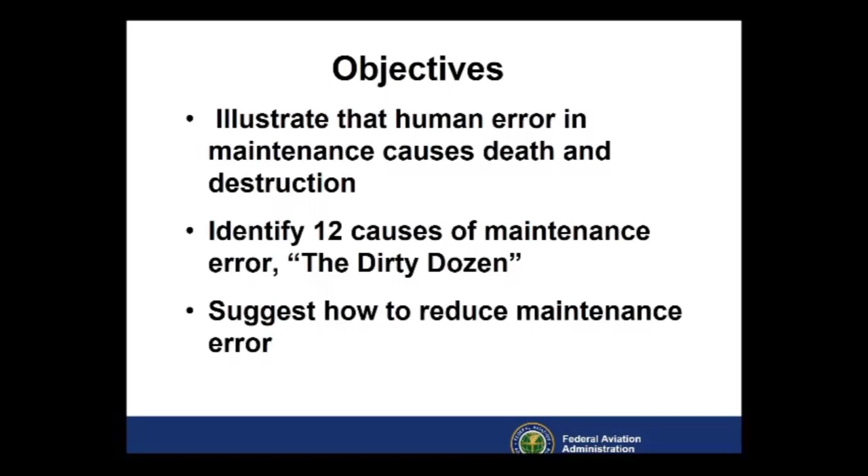Human error is both universal and inevitable. This means everyone will make a mistake sooner or later. In fact, the best people often make the worst mistakes. When learning of an accident caused by human error, it is common to think the person involved is somehow deficient in skill or character, while we, on the other hand, are well-meaning, motivated, experienced technicians. We just wouldn't do something that stupid. When we think in these terms, we discount the moral of the story and miss the lesson in it.

Apologize for the background noise. Before takeoff, the pilot set his altimeter to his home base field elevation at Nellis Air Force Base. His action perhaps was the result of habit. The elevation at his air base that he was at was 1,100 feet higher than Nellis. Even though the mistake was slight, setting the wrong altimeter setting, the outcome was tragic.

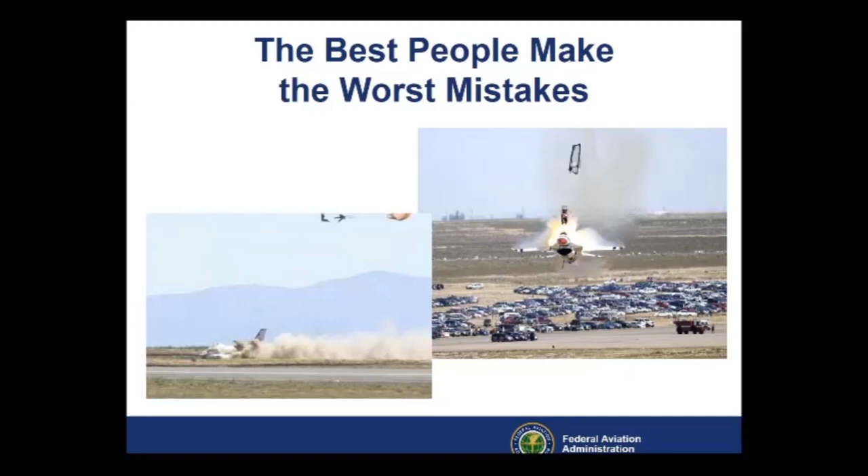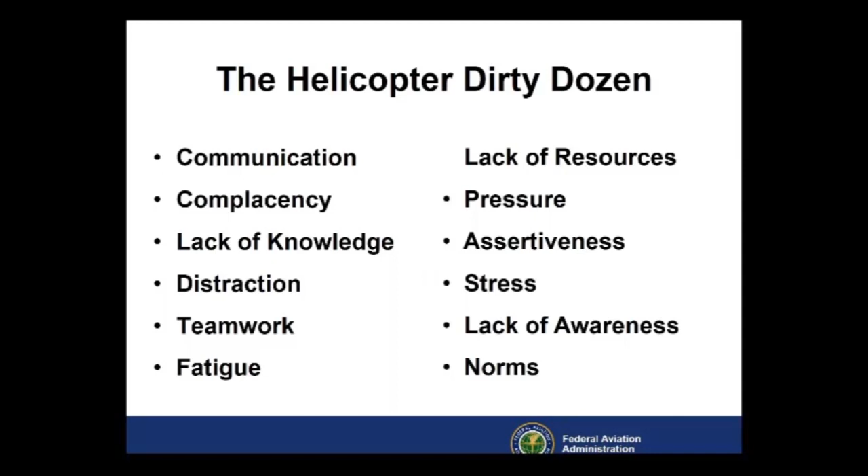So how do we prevent mistakes like this one? How do we break the chain of events that may well result in the loss of an aircraft or, worst case, a fatality? The Dirty Dozen is a poster series highlighting 12 preconditions for unsafe acts. In other words, factors that influence people to make mistakes. The series of posters was developed by Gordon DuPont while working with Transport Canada. It's not meant to be a comprehensive list. It's just meant to stimulate the human factors discussion.

Okay, so this is our first case study that we're going to cover for the Dirty Dozen. It's actually going to cover most of the Dirty Dozen. I would say maybe about 7 of the 12 Dirty Dozen are going to be covered by this one accident.

So on July 28, 2010, at 13:42 Mountain Standard Time, an Air Methods Corporation American Eurocopter AS-350B3 medical helicopter, November 509 Alpha Mike, during a VFR flight, under Part 91, descended rapidly and collided with terrain in Tucson, Arizona. The aircraft was substantially damaged and consumed by a post-impact fire. The pilot and 2 medical flight crew members were fatally injured.

The repositioning flight was for engine coking originating at the Marana Regional Airport in Tucson, Arizona at 13:32 hours, and the intended destination was the Air Methods Base in Douglas, Arizona.

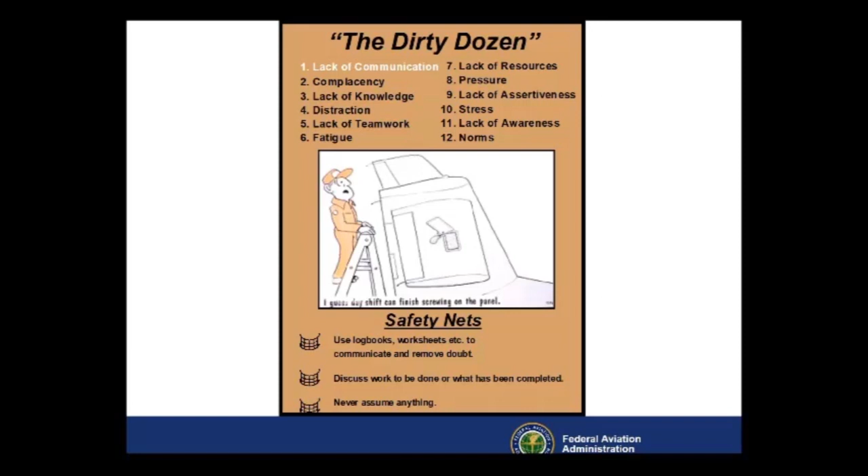Okay, we're going to cover a document that the FAA uses very often. I'm going to give you a little bit of background on that.

In 1953, the Civil Aeronautics Board, or CAB, revised the Civil Air Regulations to require that each operator apply for an OPSPEC, or Operation Specification, at the time of application for an air carrier certificate or an air agency certificate. Air carriers that existed at the time were issued OPSPECs to be used instead of the competency or temporary letters. The OPSPECs provide an effective method for establishing safety standards that address a wide range of variables.

In addition, OPSPECs can be adapted to a specific certificate holder or operator's class and size of aircraft and different kinds of operations.

Let's review. We're going to discuss the Dirty Dozen. So look at this, on the slide you see lack of communication between the FAA inspectors and the repair station.

So when the investigation was conducted, the FAA principal maintenance inspector stated he removed the work-away-from-station authorization for the repair station that supported Air Methods. The owner of the repair station stated he did not identify the changes when he signed the page of A004.

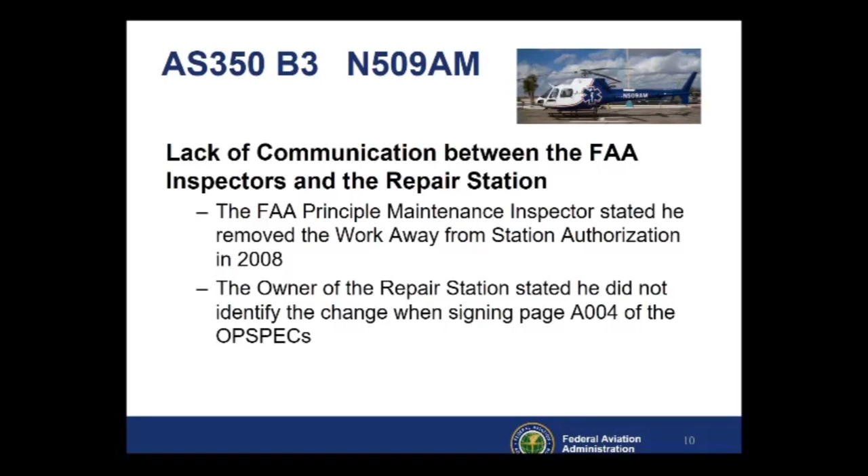Of the OPSPEC. So you ask, what does an OPSPEC look like? This is what they look like.

And they're issued to any operator or agency. When we talk about operator, we could be referring to an airline, a charter operator, or an air agency, which is a Part 145 repair station.

Okay, so here's the example. The red arrows point to the paragraphs issued in this situation. So you're actually seeing what the OPSPECs look like for this type of operator.

A004 is like a table of contents for OPSPECs. It lists all the OPSPECs that pertain to that operator. And you notice over here on the right, I've got an arrow pointing to Delta 100, which means it was issued.

The ability to operate, perform work excluding continuous operations at additional locations other than its fixed location. A101 is perform work including continuous operations at additional locations other than a primary fixed location.

So if you look over to the right, this is the D100 paragraph that's issued, and down under Alpha and Bravo it gives you whether they can or cannot operate continuously.

So if you read Bravo, you're going to see the certificate holder may not perform continuous operation at a facility other than a station's fixed location.

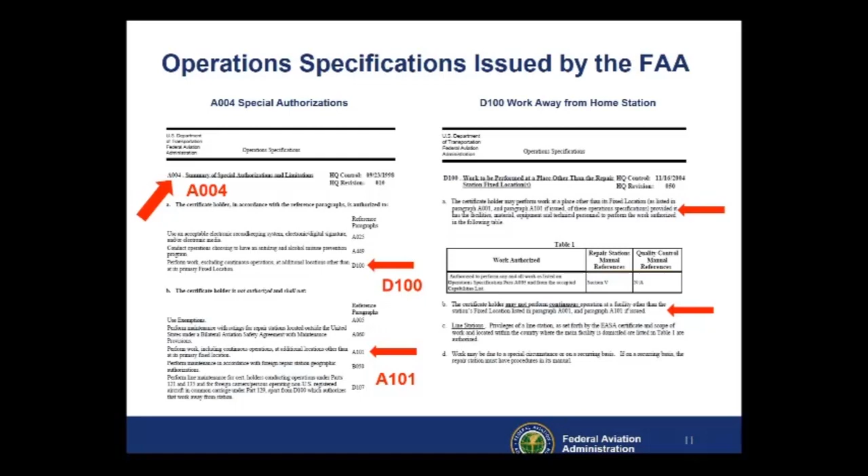The next Dirty Dozen item we're going to cover is complacency. It can be caused by a lack of sufficient stress. We hear stress is bad for our health, and too much unresolved stress certainly is. However, we need a moderate amount of stress for optimum performance.

While too much stress causes confusion and fixation, too little stress can be a problem as well. It can cause a person to be bored and complacent. The following example is a case where a complacent person's mistake had dire health consequences.

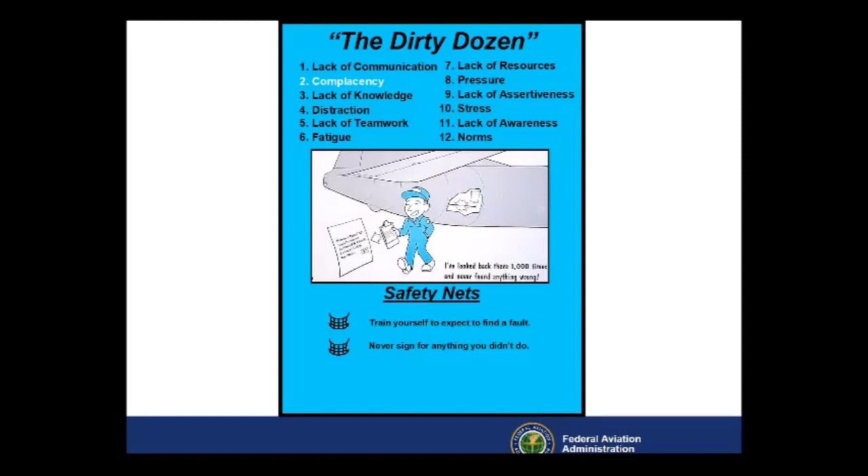Everybody's experienced this in life. When you get really stressed out, you get frustrated. But when things are too relaxed, sometimes it can and cannot be good. So let's go ahead and cover that dirty dozen.

Here's the example of complacency: the Turbomeca service. I want to mention one thing real quick too.

All of these organizations are professional organizations that we use for these case studies. They're very professional. I myself worked for Air Methods for many years, and they were very professional, very organized in what they did. This is not a knock on any of these organizations. I just wanted to mention that real quick.

As a Turbomeca Service Center, Helicopter Services of Nevada provided levels 1, 2, and 3 maintenance, service, parts, and tools. The Turbomeca Service Center technicians completed a Turbomeca design checklist and engine build when performing field maintenance. Turbomeca, who makes the engine, does not require its outside service centers to document their work with the forms, and they are allowed to develop their own forms to document work. Helicopter Services of Nevada developed their own work order forms and checklists that were completed when work items were accomplished.

In the interviews with the HSN mechanic, he reported that when an in-house inspection is performed, they used an FAA 8130-3 form, the work order package form, as well as a final inspection that was completed. He reported that when mechanics are working in the field, they don't complete the 8130-3 form and do not do the thorough inspections and paperwork that occurs when engines come into the repair shop, due to the specific nature of the field work items requested.

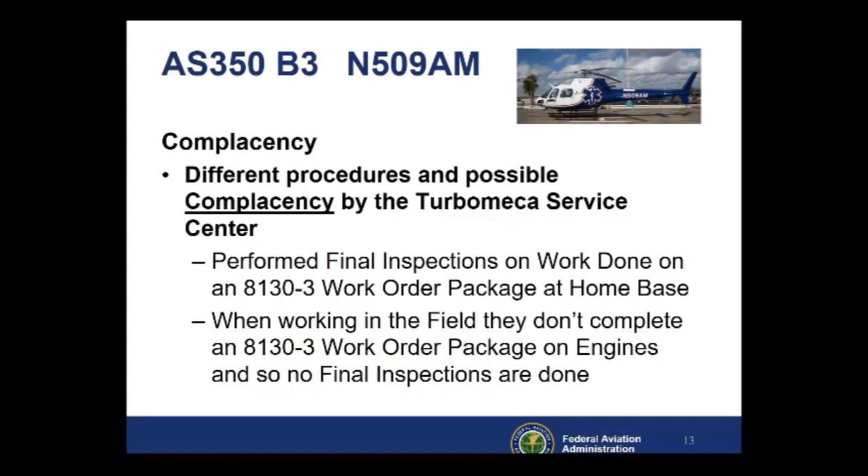So the safety nets you need to remember on complacency are: we need to face the reality that our industry's mistakes, even slight ones, may kill someone. Some of the safety nets you can implement are physical fitness, which helps you think clearly and makes you feel good.

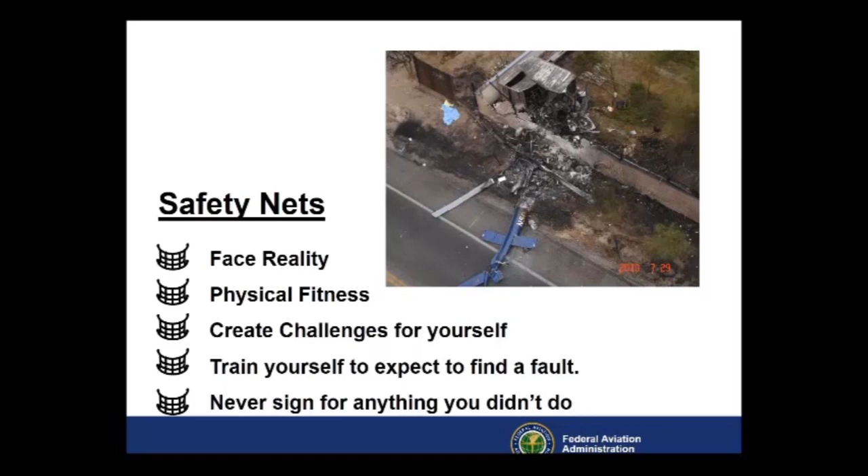Create challenges for yourself. Challenge yourself to find faults every day. Never sign for anything you didn't do. It's also an ethical decision you have to make sure you're making, when you don't sign for something you didn't do.

The next item we're going to cover on the dirty dozen is lack of knowledge. You may think lack of knowledge is about inexperience. However, the rational point of view is that aviation is incredibly complex. No one has all the answers. We might all lack knowledge in tasks that are not familiar to us.

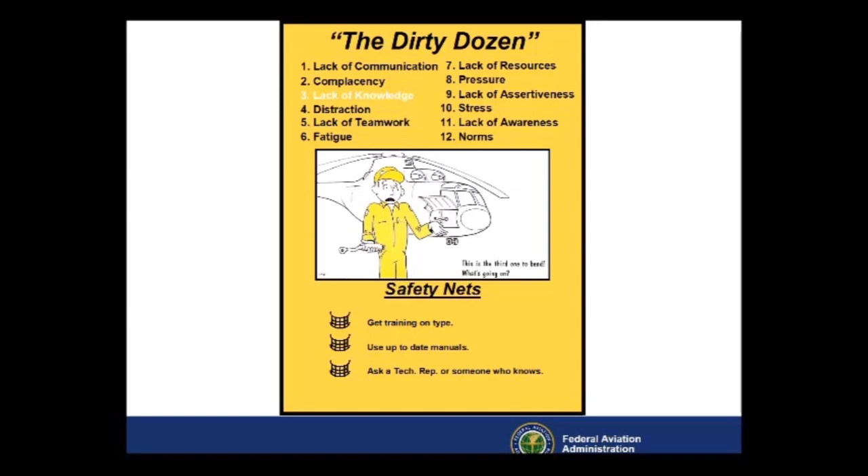Even experienced people need to refer to up-to-date manuals and ask questions. People can be very sharp and very well-meaning, but if they are untrained, bad things can happen. Even in this presentation, I had to call my guys I used to work with at Air Methods and ask them questions about the engine, because I couldn't remember all the stuff I used to do back in the day when I was a relief mechanic for Air Methods.

Lack of knowledge—this one is actually for the pilot. Here's what happened: the Marana duty pilot performed a ground run of the helicopter after all the maintenance was done, and they found that the engine's hydromechanical unit was found to be leaking.

The next day, on July 27th, the HMU leak was resolved and the pilot again performed a ground run. The ground run came out good, and the pilot then asked for permission from the area aviation manager to put the base out of service while he performed the post-maintenance flight check.

The Air Methods AVL hub interface—I'm going to assume this is a computer system that tracks how long the aircraft flew remotely—recorded that the maintenance test flight occurred on July 27th from 1743 to 1750 hours, that's just 5:43 p.m. to 5:50 p.m., just converted into military hours. So we're talking a total of 7.5 minutes.

According to the pilot, the following items were done during his maintenance check. As you can see by the slide, he did a droop check, a rate of climb check, a cruise power check, a flight limit indicator check, a flameout check, and an autorotation.

Now, 7.5 minutes doesn't seem very long for all those checks, but that's what the system recorded. And there were no actual written records of that test flight of exactly what he had done.

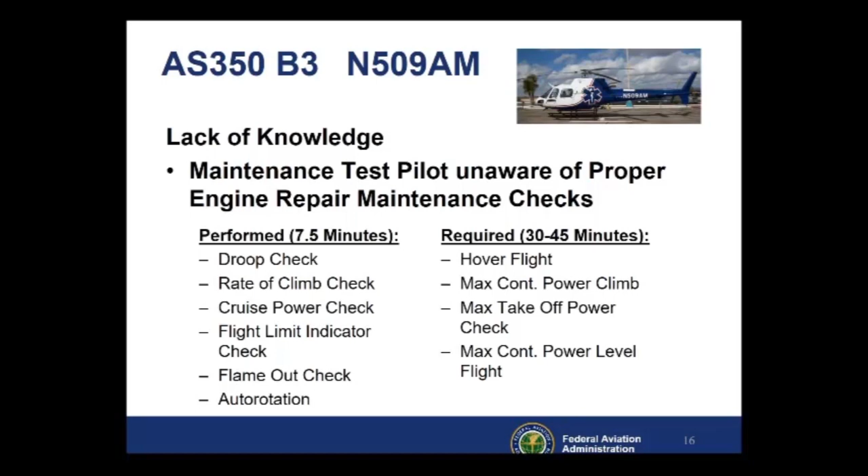Now, what I will say is this pilot that did this test flight did not realize he was doing the incorrect items. So what I would say is for mechanics and pilots, always check your manual. And if you're not sure, always go to some expert or mentor who knows more than you and ask them where it might be in the manual.

Okay, the next item we're going to cover is lack of knowledge. Here's some things you might want to consider. Get training on type. Bad things happen to untrained people.

Put yourself in the place of the maintenance test pilot. He was trying to save the company money by saving hours, cycles, and fuel costs. His motivation was not in doubt. His method leaves a bit to be desired. He probably would have liked to know what should have been tested after an engine disassembly and reinstallation of a turbine engine on an AS350B3.

So recommendations or your actual safety nets are going to be stay current, read up-to-date manuals, trade magazines, websites, and human factors information. And I appreciate you guys being on this webinar because it shows that you're trying to stay current. Use up-to-date manuals.

Also, ask a tech rep. Tech reps are actually very approachable and will help you in a lot of cases if you get stuck on a situation. So definitely get in touch with them and communicate.

Humility will make you go a long ways in aviation. I had to swallow a lot of humble pie in my career. Thank God I did because I needed to. I learned a lot when I did that too.

So the next item for the Dirty Dozen is distraction. Does anyone have a cell phone? It's become a feature of our culture, whether we're driving, listening to a speaker, or maintaining an aircraft.

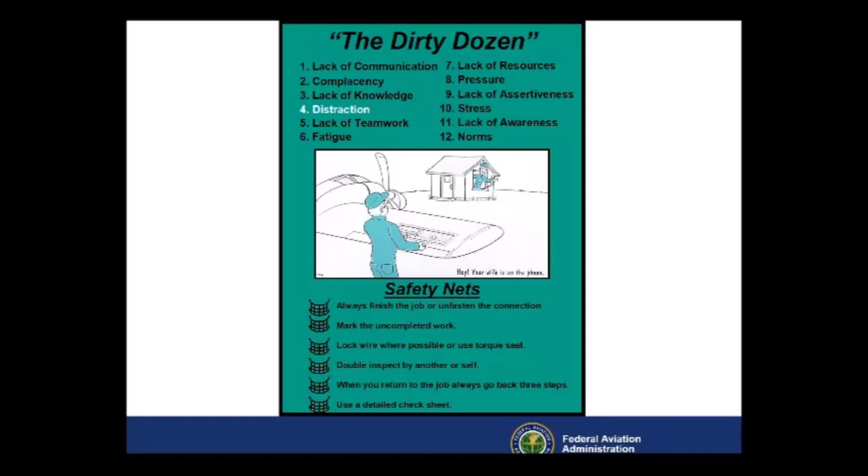This example, though, is going to be an interesting one for you. So on September 16th, 2017, at about 4:35 Mountain Daylight Time, a Bell 206 L-3 helicopter, or a Long Ranger, November 213 Tango Victor, impacted terrain near Ancho, New Mexico.

The pilot, the sole occupant, was fatally injured, and the helicopter was destroyed. It was a flight that had originated at about 3:45 p.m. from Roswell International Air Center Airport in Roswell, New Mexico, destined for Albuquerque International Sunport in Albuquerque, New Mexico.

So let's just review the slide real quick. He was doing a cross-country business flight in a helicopter, and the weather was good and visibility was at least 10 miles. So everything was just as clear as could be.

The last 5 minutes of the flight, however, the helicopter's GPS altitude varied between 6,200 and 6,456 feet. But the terrain in the accident area was between 6,000 and 6,400 feet. The impact point was at 6,330 feet.

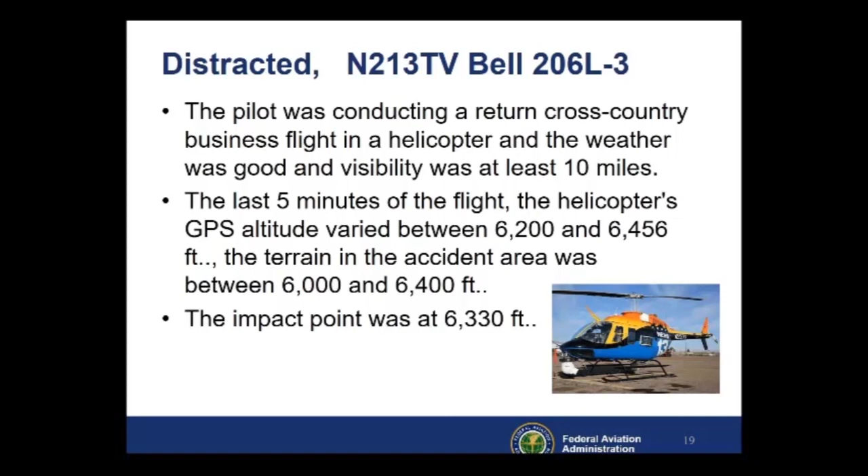Anyone want to guess what happened? Note, this is about distracted flying.

The pilot's cell phone was recovered, and a review of the phone records revealed that at 4:12 p.m., he called a rental car agency. An agency employee stated that she remembered the call well. She added she could not tell that he was in a helicopter, but that he seemed busy or distracted. And that, as they were talking about a future rental, mid-sentence, the line was disconnected. Interesting.

No matter how you look at this accident, it was caused by a distracted person who was attempting to save time, but was not in a good situation to use the device. As you can see by the slide, you can assume he was distracted by a cell phone.

Here's what I would recommend. It's best to use the communication systems in your aircraft since they're designed to be used during flight. And I'm going to let you guys know, in a helicopter you don't have many limbs available to do things with. A handheld cell phone is not designed to be used by a pilot in an aircraft.

One other consideration, most important, is that helicopters have 3 controls, and a person should be operating these with their limbs. If there's any non-helicopter people listening, just for your information, one is the collective with one hand, the other control is the cyclic in another hand.

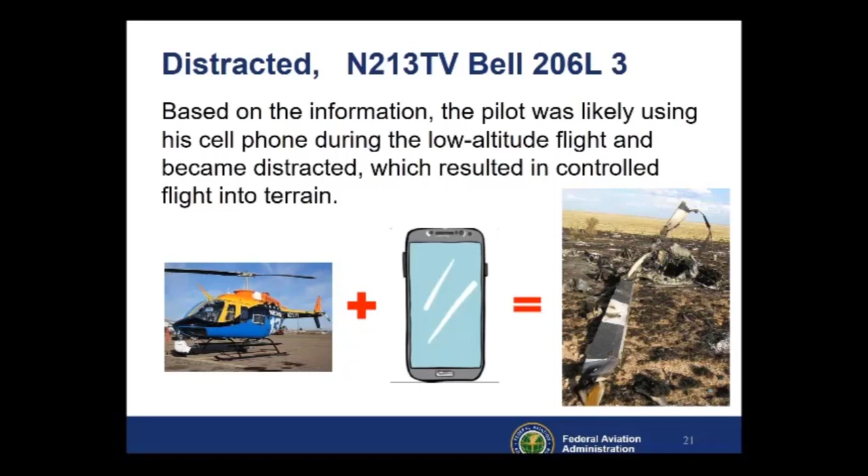And the other is using their feet to operate the tail rotor pedals. So how can you operate a phone with all your arms and legs in use? Yeah, you can't. I feel bad for this guy and his family. I really do. But let's know saving time is not always worth it.

Next up on the Dirty Dozen is safety nets. Don't use cellular phones while conducting maintenance or while flying an aircraft. Don't try to do 2 things at once. Always finish the job or unfasten the connection.

In one of the cases described earlier, finishing the job by torquing the hardware could have prevented the accident. The alternative would have been to leave the connection unfastened. That would have also prevented the accident. The engine would not have started if the fuel line was disconnected, or he could have marked the uncompleted work by hanging some wire or maybe a remove-before-flight tag.

You can lock wire where possible or use torque seal. You can double inspect by another or self. You can use a detailed check sheet. When you return to the job, always go back 3 steps if you have to stop at a certain point. That's a great recommendation.

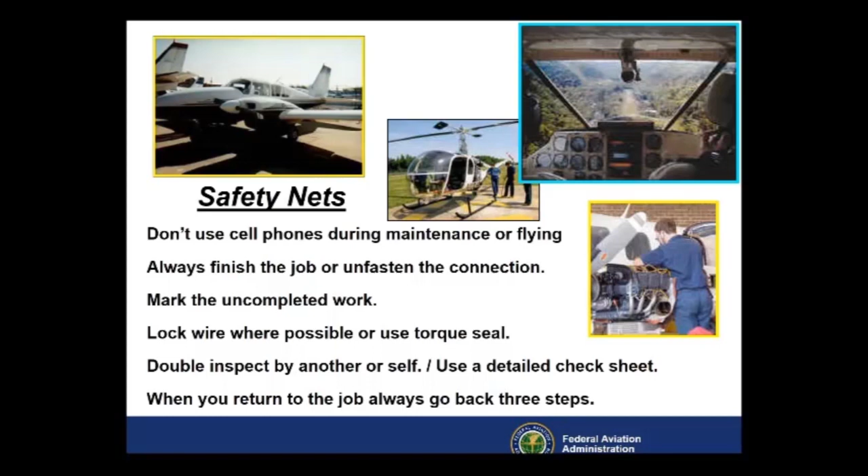The next item up on the Dirty Dozen is lack of teamwork. As mechanics, we're used to working alone, so the concept of teamwork can be a real change in thinking. And I say this because there are some isolated bases out there.

I'll give you an example. If you're out there in Alaska and you're a single person at your base, you don't have anybody to look behind your work. So you're going to have to look and have yourself as a double checker. Just remember that. But if you have a pilot, you can always have them check. So consider that when you're using teamwork, and always communicate.

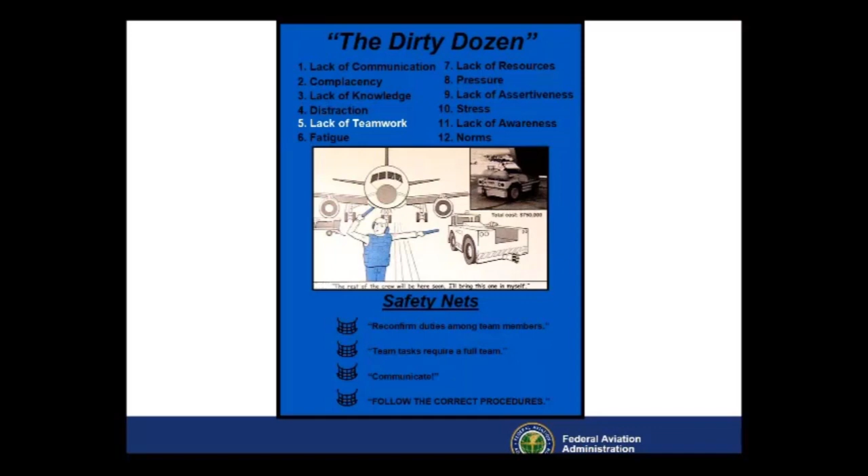And here's the example for lack of teamwork. Between 24 July and 26 July, the accident engine was disassembled first, and the mechanics realized they would need additional parts and tooling to complete the work. The accident engine was set aside, and the second engine was disassembled and the fuel manifold replaced.

As the Air Methods mechanics completed the work on the second engine, the HSN, or repair station technician, replaced the manifold on the accident engine. During the work on the accident engine, Module 3 was disassembled, the fuel injection manifold was replaced, and the engine was reassembled by just the HSN technician, including the fuel inlet union.

The engine was reinstalled into the helicopter by Air Methods maintenance personnel. The HSN technician inspected his own work, and as an HSN technician working away from its fixed location, he had the authority to inspect his own work. So just remember that. This is one of those situations where the HSN technician was within his legal authority, but...

Let's ask that question on the slide. What would have happened if he would have asked the Air Methods mechanics to check his work before reassembly? Oh my gosh, this whole incident would have never happened. It's easy for me to say that in hindsight, knowing all this information, but when you're in a detailed work environment like that, digging into an engine and reassembling modules, that's pretty complex work that we all have to do, and do safely.

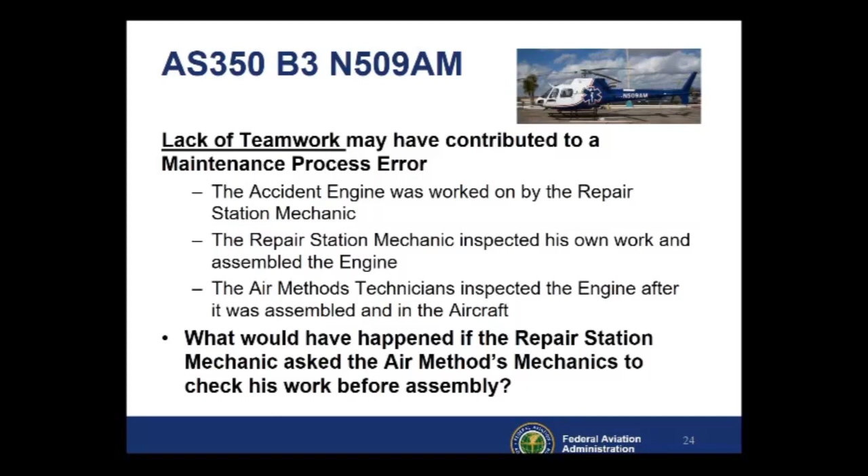So let's continue on with this. This is more information on what happened with this accident. This is the as-received parts displayed in the upper figure. So these are all the parts that were found at the accident site, which is the fuel line, the jet union, where it would be attached to the diffuser assembly with a copper gasket between.

So these are the items that were intact but reportedly found disconnected at the jet union to diffuser connection. Note the bolts - the manual calls them screws, but they're technically bolts - and nut hardware were not found at the accident site.

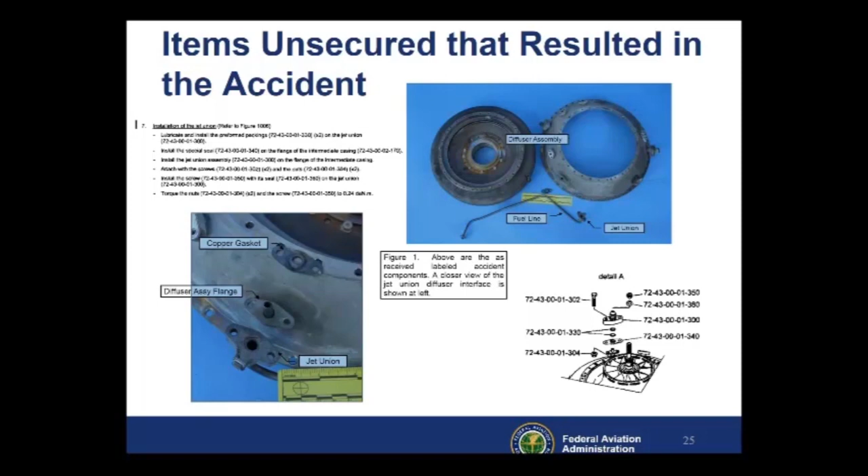So these are new examples of the components that were received for comparison. The detail A in the picture displays the exemplars of the jet union associated attachment hardware. The items that they couldn't find were the mounting bolts and nuts. Those were the items that were missing.

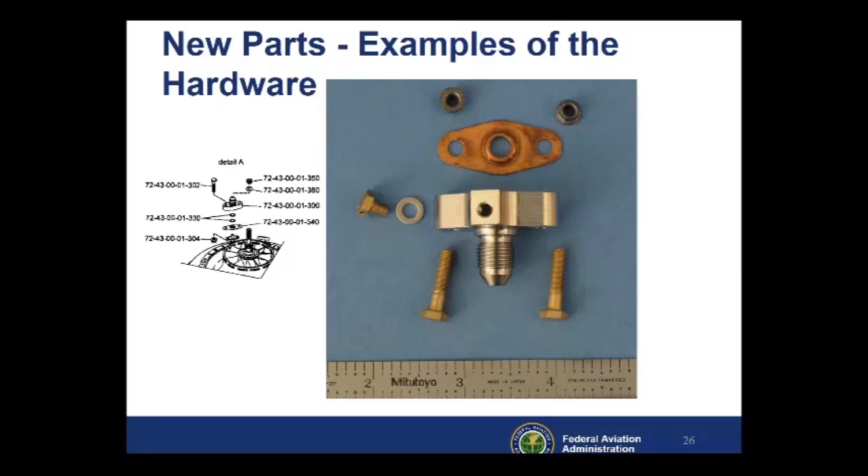We can only make an assumption that the mechanic may have finger tightened them and not actually torqued them, but we don't know for sure because they were never found at the accident site.

Okay, let's cover the safety nets for lack of teamwork. Communicate. Go ask that person across the hangar to inspect your work before you put a cover panel on. Team tasks require a full team.

Eat some humble pie. I've made mistakes in the past where I had to eat humble pie, and it's always a good idea to have someone look at your work. Follow the correct procedure and reconfirm those duties among team members. Those are some good safety nets to remember for lack of teamwork.

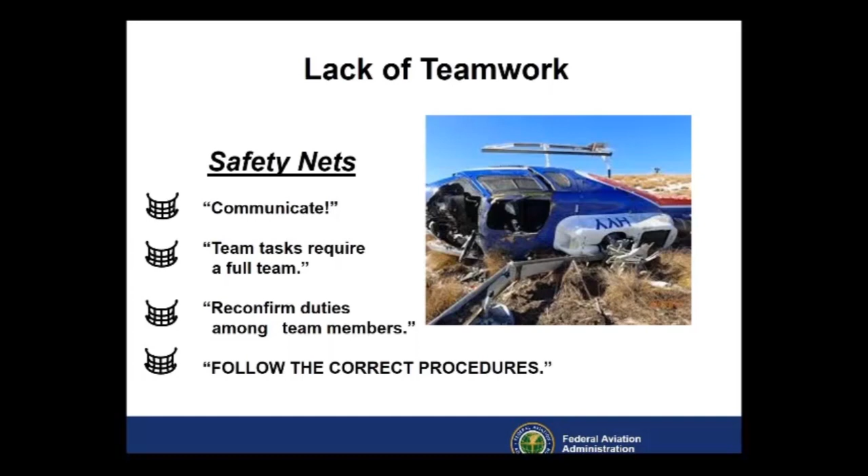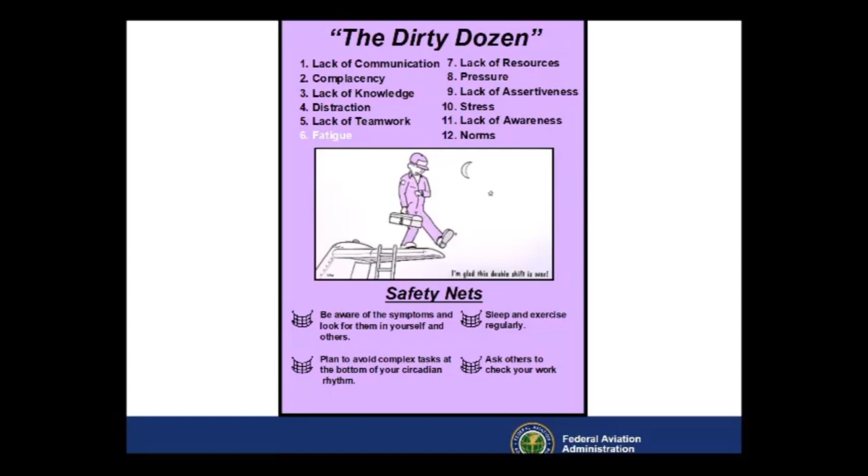The next item we're going to cover is fatigue. Fatigue is a constant threat to all of us. There are three types of fatigue. Acute and operational fatigue are really the same thing. They're caused by hard work and long hours. It's really only a matter of duration.

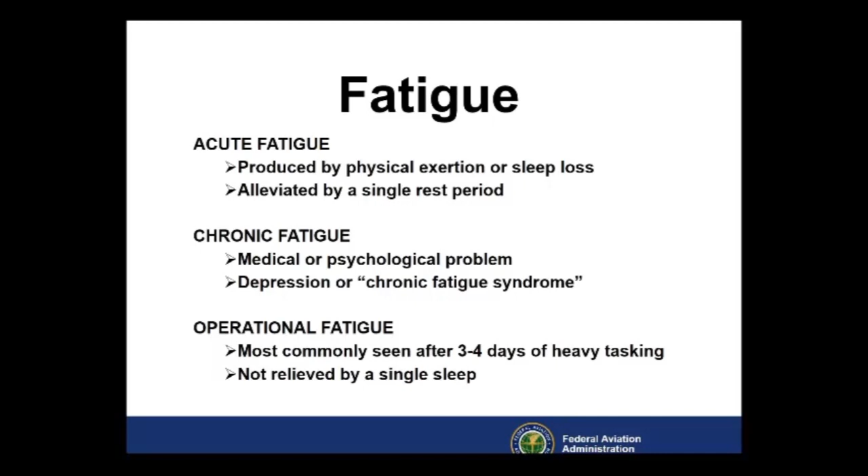Chronic fatigue is something that requires medical intervention. It is depression and needs at least counseling and possibly medicine. Symptoms of fatigue.

These symptoms are true of fatigued people regardless of the category of fatigue they're experiencing. Chronic fatigue and chronic pain are similar in that they exhibit similar symptoms. The symptoms are often more evident to those who are working around the fatigued ones than it is to them. And that is definitely true.

I've worked in environments where we've had to stay up long hours in the military, and you'll notice that when people become fatigued, they'll start slurring their speech. They'll start making a lot of mistakes. So be on the lookout with your coworkers and let them know if you see them fatigued.

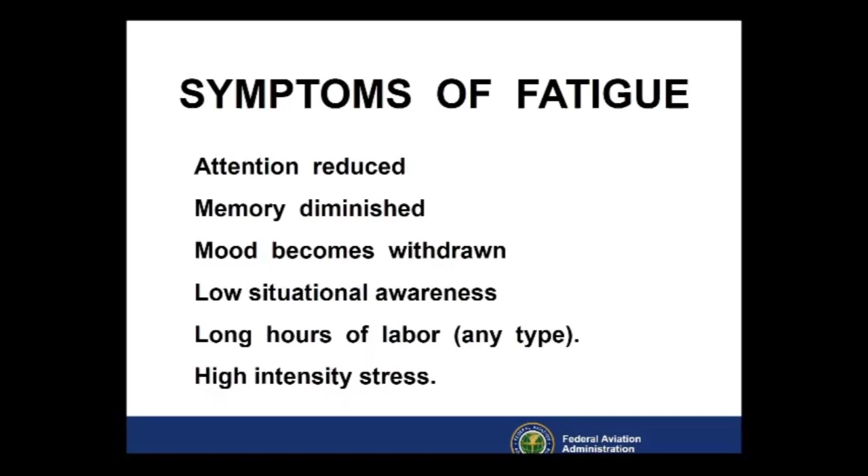And this is a really interesting slide. We're going to cover this accident here in a little while, but this is a chart that is an example of how you can compare fatigue to the impairment of blood alcohol effects. Blood alcohol concentration levels represent the percent of your blood that is concentrated with alcohol. A BAC of 0.10 means that 0.1% of your bloodstream is comprised of alcohol.

So let's look at this slide. Would you go to or stay at work if you were awake for 17 hours? That example is equivalent to a 0.05% blood alcohol concentration. 22 hours is equal to 0.08%.

24 hours is 0.10%. One thing that's interesting about this slide is all of these would exceed most of the country's limits. So it concerns me, especially when you get to 24 hours, there is no country that you would not be considered impaired in with 0.10%.

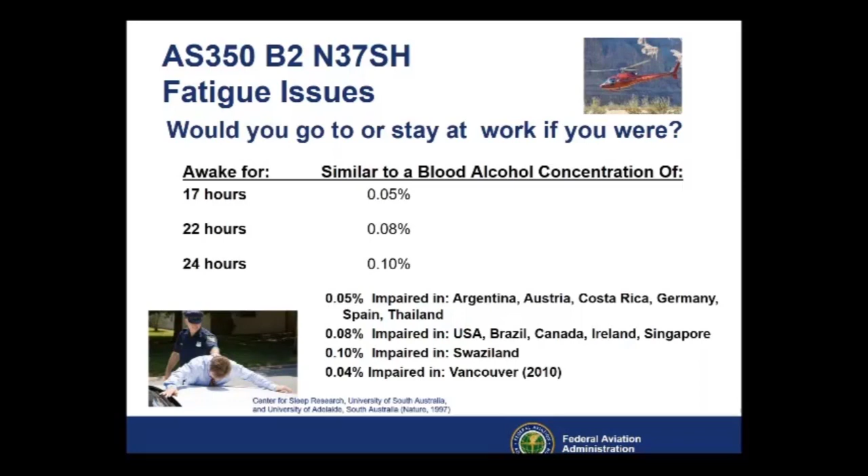But the mechanic claimed he only got 5 hours of sleep, and the inspector claimed 7 hours of sleep. Again, Tim Haley will cover this accident on this AS350B2 coming up.

You know, I've been through this also with heavy maintenance when you're trying to get an aircraft in and out. I'm sure you probably have too.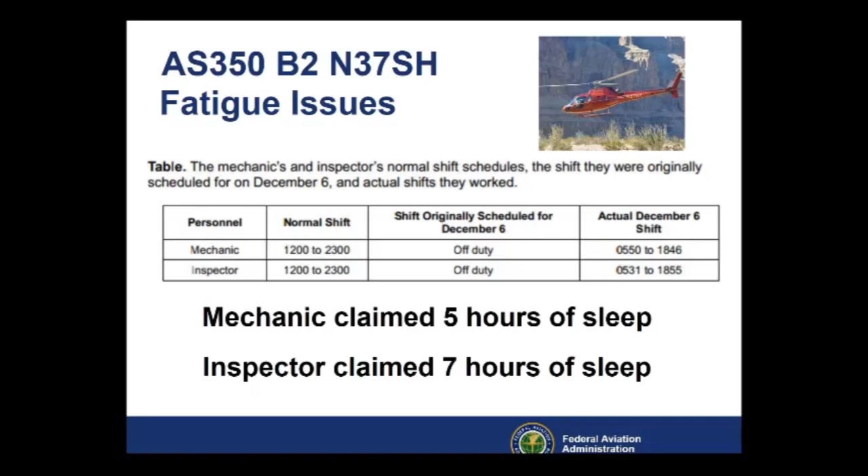Some of the safety nets that you want to make sure you're aware of for fatigue is be aware of the symptoms and look for them in yourself and others. I mentioned this earlier. Sometimes it helps to notice it in others because when somebody becomes so exhausted, they don't realize that they're slurring their speech, they're having problems speaking, and they're having problems thinking clearly.

Plan to avoid complex tasks at the bottom of your circadian rhythm. Sleep and exercise regularly. Ask others to check your work. Those are really, really good safety nets for fatigue.

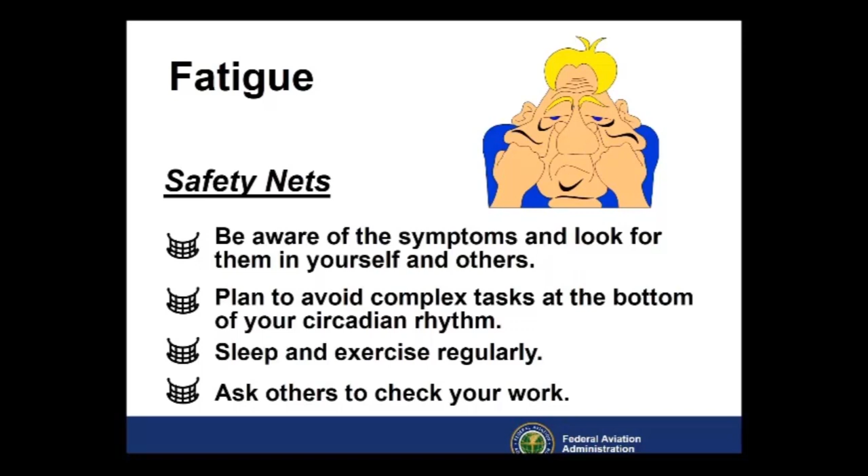We're going to talk a little bit about lack of resources. I think we've all probably ran into the issue of lack of resources. Parts availability is certainly important. However, to expand the topic of lack of resources, what would be a list of important resources? How about money? Parts are expensive. What about people? Mechanics called in sick today, supervisors out. How about time? Deadlines to meet. Tools, specialized tooling we don't have it. Data, we don't have the proper manuals.

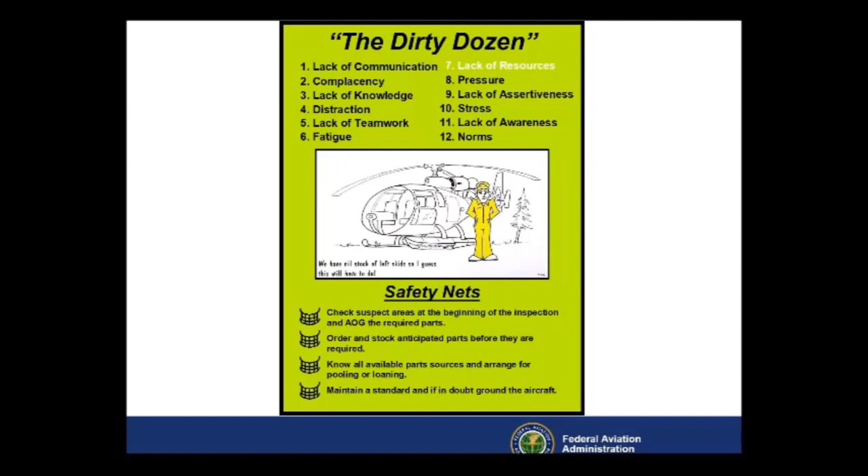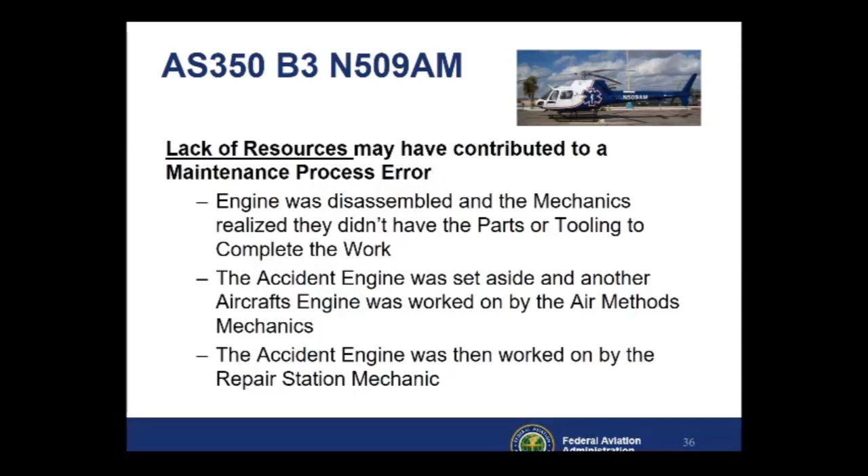Lack of resources may have contributed to a maintenance error, process errors. The engine was disassembled and the mechanics realized they didn't have the parts or the tooling to complete the work. The accident engine was set aside and another aircraft engine was worked on by the air methods mechanic. The accident engine was then worked on by the repair station mechanics. It seems like we're picking on this air methods, but this is a good example of the chain of events. There was a lot of different breakdown in the dirty dozen that led to this accident.

The HSN technician inspected his own work, and as the HSN technician working away from its fixed location, he had the authority to inspect his own work. The air methods mechanic stated that they did not specifically inspect the HSN technician's work. However, they did inspect the engine after it was installed into the helicopter. Federal Regulations Part 135 does not require an independent inspection of maintenance.

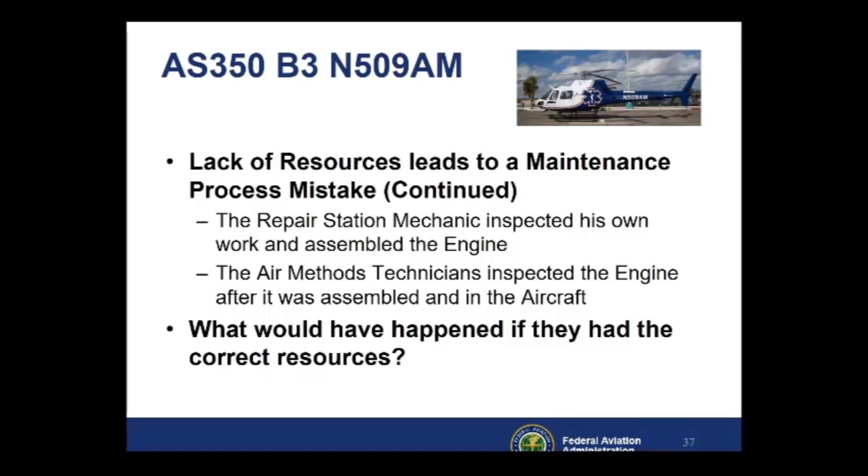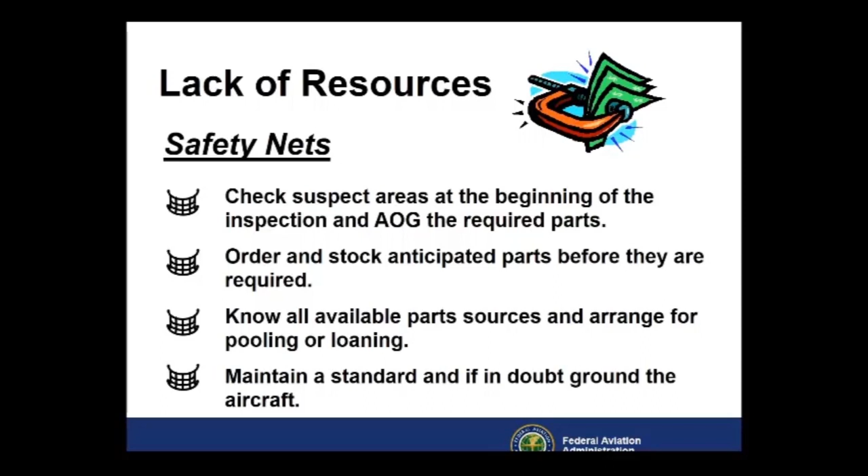So what's the safety nets that we could have used for lack of resources? Check suspect areas at the beginning of the inspection and AOG the required parts. Order and stock the anticipated parts before they're required. Know all available part sources and arrange for pooling or loaning. Maintain a standard, and if in doubt, ground the aircraft. That last one seems to be the one we all have trouble with. Nobody wants to be the person that grounded that airplane.

So let's move on to number 8, pressure. That's one we probably all felt right there. A certain amount of pressure is appropriate, but too much pressure can cause a technician to make a mistake. If there is a generic hazard in aviation maintenance, it would be pressure to produce. Pressure to produce causes a drift to dangerous methods. Pressure to produce is where the shortcuts come in. Features of pressure to produce are completion of work desired, lack of resources, supervisor condoning unapproved action to get the aircraft underway. The end justifies the means. Releasing the aircraft with work undone.

Signs of excessive pressure to produce are being asked repeatedly, how long is this going to take? Getting frustrated and angry during the job, wanting to go home.

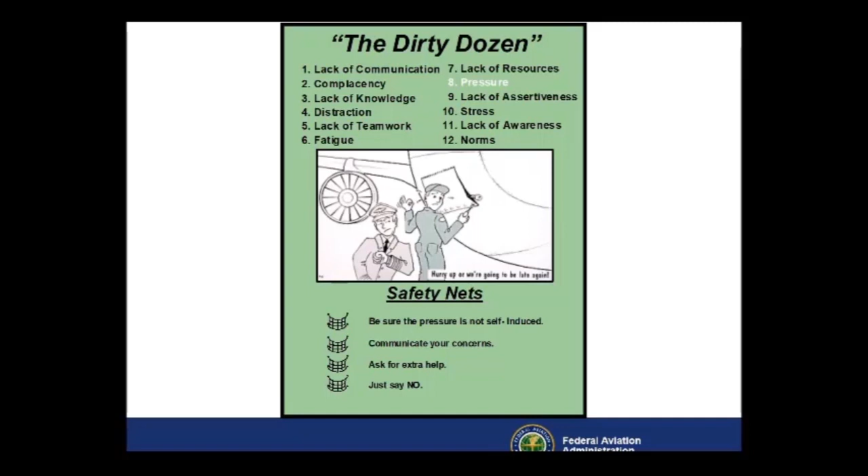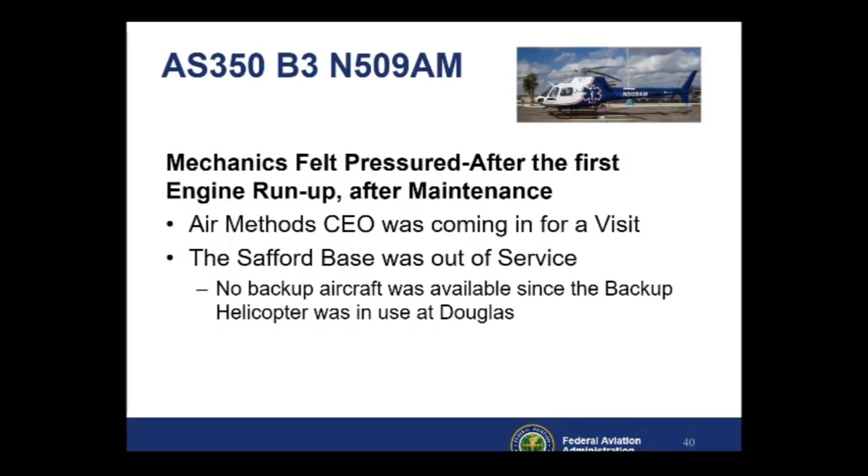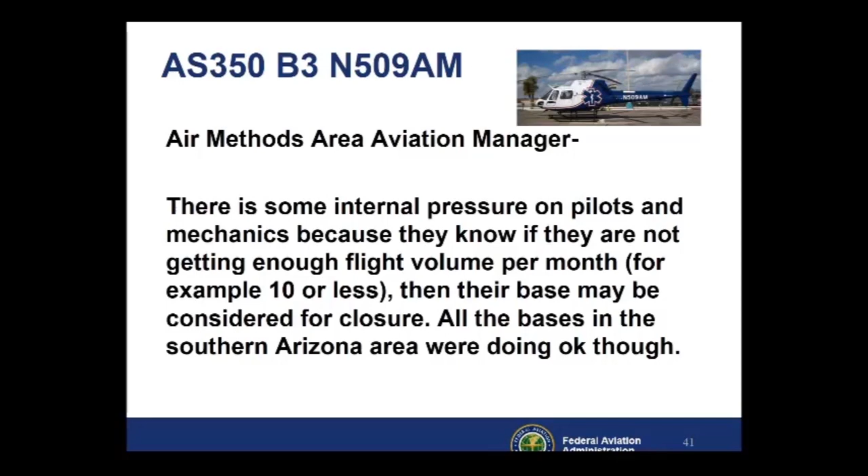Mechanics felt pressured after the first engine run, after maintenance. The Air Methods CEO was coming in for a visit. The Safford base was out of service. No backup aircraft was available since the backup helicopter was in use at Douglas. Interviews with the Air Methods mechanics and the HSN technician, they all reported feeling a sense of pressure to complete the maintenance and return the helicopter to service. The Air Methods area aviation manager stated there is some internal pressure on pilots and mechanics because they know if they are not getting enough flight volume per month, for example 10 or less, then their base may be considered for closure. All the bases in southern Arizona area were doing okay.

So let's take a look at this V-22 Osprey. The Bell Helicopter Textron Boeing V-22 Osprey tilt-rotor aircraft was being ferried to a military base in Quantico, Virginia, when it suddenly plunged into the Potomac River while on the downwind for landing. The crash on July 20th, 1992 killed all 7 crew members aboard.

The court of inquiry said that the fluid leak into the right engine may be attributed to maintenance errors installing an oil seal backwards on the torque meter shaft. But the report added that it could not conclusively determine that this reversed oil seal caused the leak. Thus, the possibility of other leaking seals or sources could not be ruled out. In addition, the report said ground testing with incorrectly installed seals did not show significant leakage, but a leak did occur on another Osprey V-22 with an incorrectly installed seal, according to the government witness.

Maintenance errors cannot be assigned with certainty, but are considered a probable cause factor. One member of the Court of Inquiry noted that the system used to conduct maintenance at Eglin lacked organization, defined responsibilities, and formal reporting and documentation structure.

Secondary cause factors, the Court of Inquiry said, included ineffective quality assurance of the oil seal installation. The report added that procedures for the removal and replacement of the torque meter seal contained in the technical manuals were vague and introduced the potential for incorrect installation.

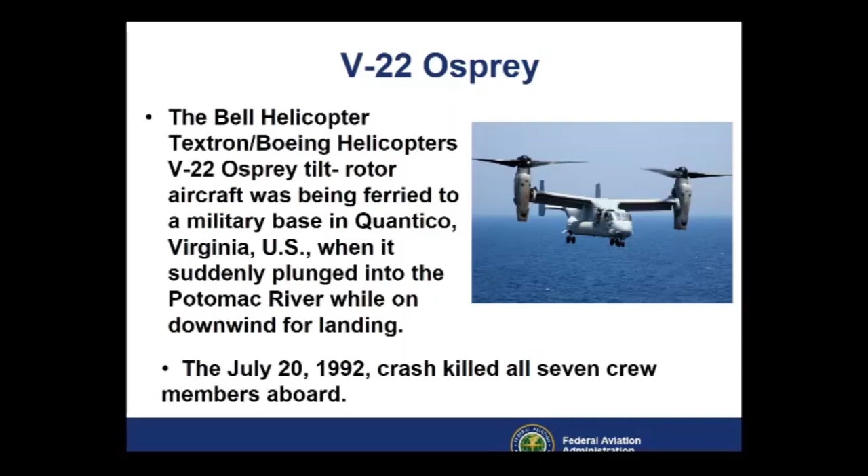Just to give you a little background on this, this is out of the Helicopter Safety Newsletter, Volume 19, dated July and August of 1993. This picture shows how the leaking torque shaft seal, leaking right here, would have the leak ingested into the engine.

The U.S. Navy Court of Inquiry concluded that the aircraft experienced multiple emergencies upon entering the downwind, and that the primary cause for the mishap was a flammable fluid leak which was ingested by the right engine. This diagram depicts and shows you how the leak could have been ingested into the right engine.

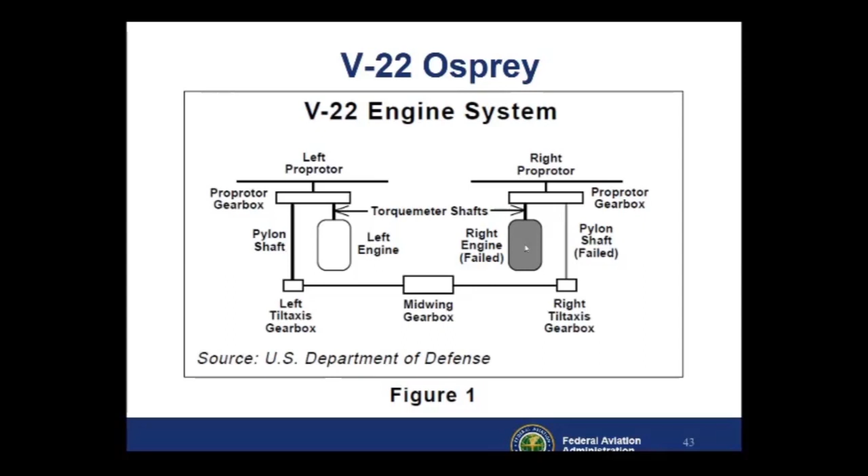The results of the crash investigation also identified human factors, maintenance, and design issues. The report said the Boeing organization at Eglin from July 18 to July 20 was inappropriately downsized, inadequately supervised, and too focused on the departure of both the team and the aircraft to ensure satisfactory completion of the maintenance requirement. What dirty dozen do you think contributed to this accident?

Short-staffed, lack of supervision, pressure to make departure time, didn't properly double-check their work, lack of knowledge, seal installed backwards, design issues. There's several of the dirty dozen that came into play right there.

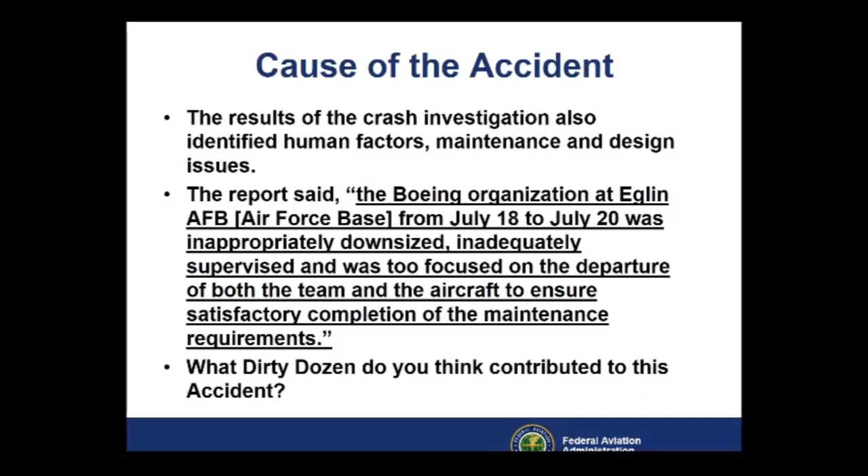So the safety net for pressure: be sure the pressure is not self-induced. How many times are we stressing ourselves by putting pressure on ourselves to meet a deadline that's not really that important?

Communicate your concerns. Ask for extra help. Just say no - that's probably the hardest one of those four right there. Just say no, because it's not in our nature as mechanics to say no, we can't get it done. We are can-do people, we want to get it out. You just have to remember, self-induced pressure can be self-reduced.

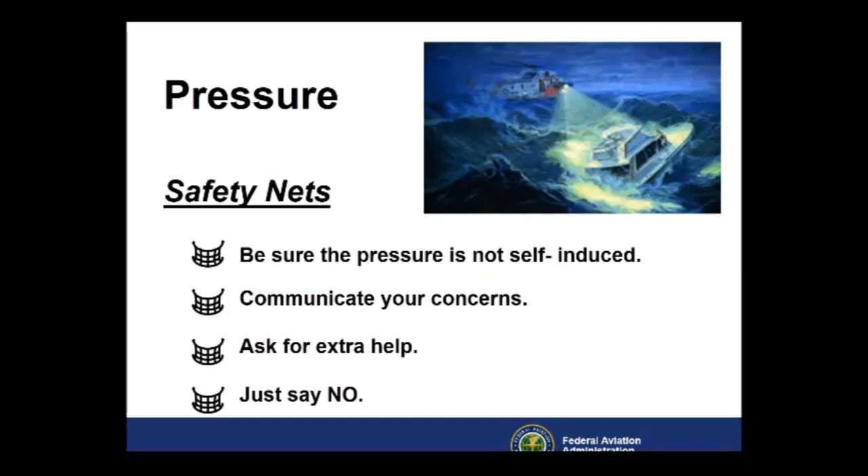The picture of the Coast Guard saving capsized boaters is a good example of when pressure is not self-induced. Anything short of life and death can be put into perspective and dealt with in a rational way.

All right, so let's talk about lack of assertiveness. Mechanics as a group are not as assertive as we could be. We like to fix the plane and leave the conflicts to the managers. We don't like having people in our face. Our culture is can-do.

Note the range between passive and aggressive is along the horizontal axis of the chart, and performance is along the vertical axis. Assertiveness resides on the continuum between passive and aggressive. One pole is the passive pole, where the person considers others' rights to be more important than his own. Someone operating at this pole will compromise their standards to get the job done. The other pole is the aggressive pole, where the person considers their own rights more important than anyone else's. This is where the person is offended and becomes angry.

Angry people nearly always regret their actions after they calm down. Neither pole is productive. Assertiveness is between the two poles - that's the green lines. It is where both parties' rights are respected. It's a space allowing teamwork and synergy.

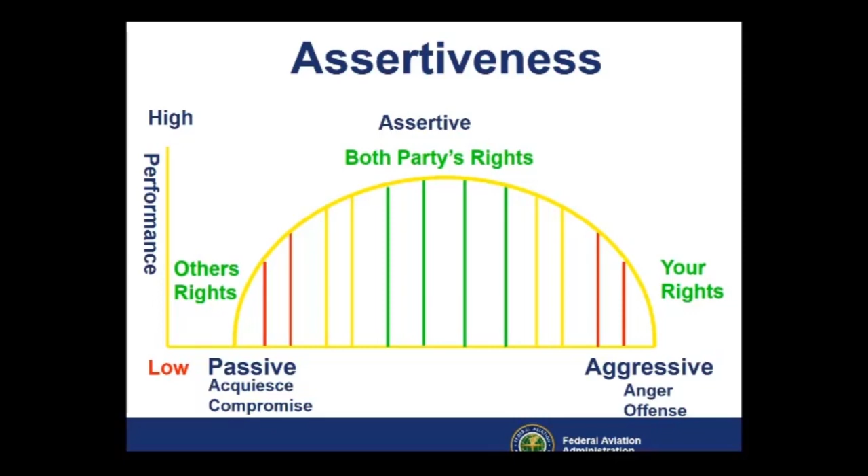So what's the safety net for lack of assertiveness? If it's not critical, record it in a journey log and only sign for what is serviceable. Refuse to compromise your standards.

This is a Canadian safety net. We don't have journey logs - we have minimum equipment lists, MELs, or other things like CDLs to fly aircraft with inoperative equipment. The idea here would be to follow the company procedures for dispatching an aircraft that isn't perfect, whatever that procedure is. Refusal to compromise your standards would keep you out of all sorts of trouble - not that it's pressure-free, however.

Do what's right even when no one supports you. Even if you lose, you really win. Not only will you be able to live with yourself, you may even save a life.

It might even be your own, for instance. Left lower picture, let's talk about that for a minute. The Italian loadmaster, an officer asked him to exit the aircraft just forward of a spinning propeller.

Is it possible that there are procedures or rules to prevent such a thing? More than likely there is. Would the aircraft commander have been very happy if the loadmaster had said in a respectful way, 'There's a rule that prevents me from stepping out of the aircraft door with the left engine running. Please shut down the left engine and I'll be happy to check the battery door.' He probably would not, but more than likely he would have done it. In hindsight, do you suppose the aircraft commander wishes that the loadmaster had asked him to shut the engine down?

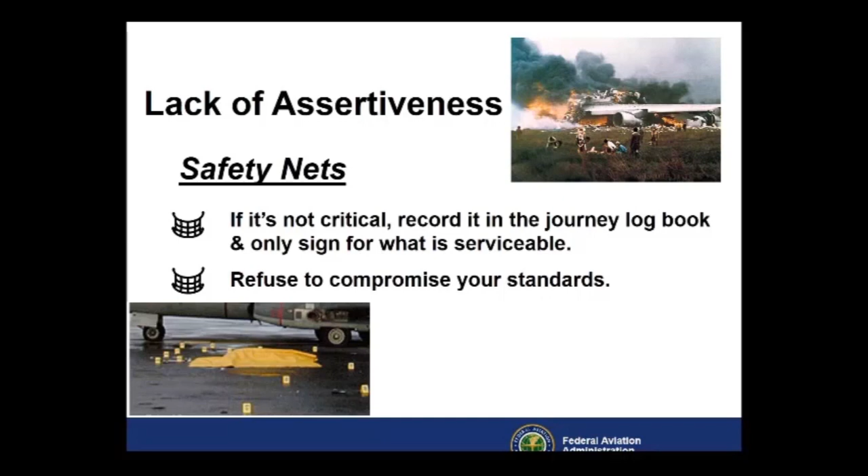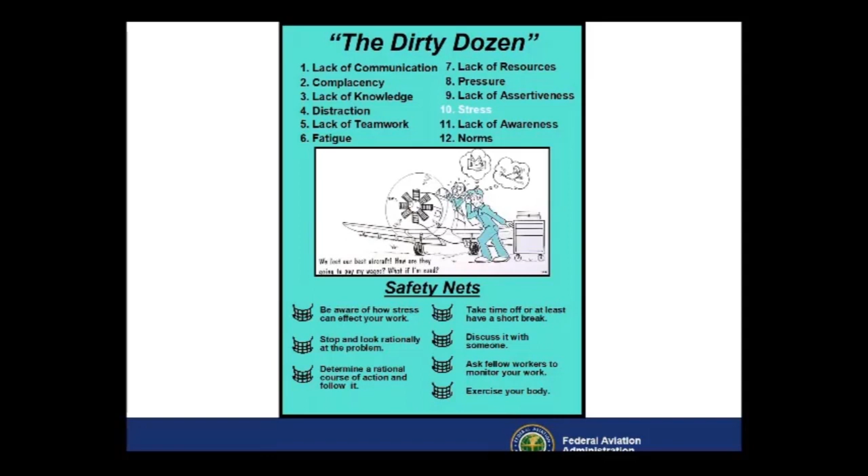Stress. Oh, here's a good one. Well, stress, it's a blessing and a curse. It's a blessing in that it is what motivates us to perform. Why do we do anything at all? We experience some kind of pressure to compel us to move. It can be pleasure or pain, but it is stress of some kind. We hear that stress is bad, but a moderate amount of stress helps us perform at our optimum level.

This is an inverted U curve, similar to the assertive chart. Note that the level of stress is along the horizontal axis of the chart and the performance is along the vertical axis. If stress is low, it causes boredom and complacency. If stress is high, then it causes fixation and confusion. For maintenance folks, it is probably a matter of confusion. I'd hate to think that a maintenance person would become so stressed that the survival instinct would kick in and he would freeze like a deer in a headlight.

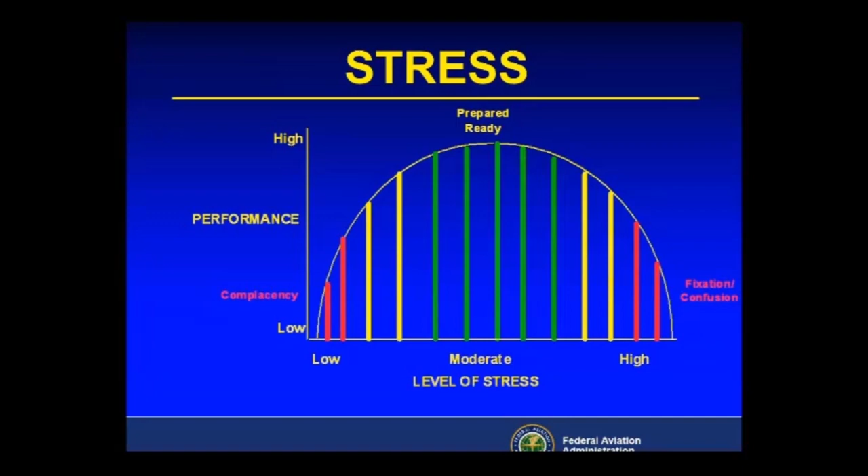A moderate level of stress is appropriate. It causes the person to be prepared and ready to perform. A moderate level of stress may be a person's supervisor giving the order to, 'Hey, you guys get busy.'

So what are the safety nets for stress? Be aware of how stress can affect your work. Stop and look rationally at the problem. Determine a rational course of action and follow it. Take time off, or at least have a short break. Discuss it with someone. Ask fellow workers to monitor your work. Exercise your body. James talked about that earlier.

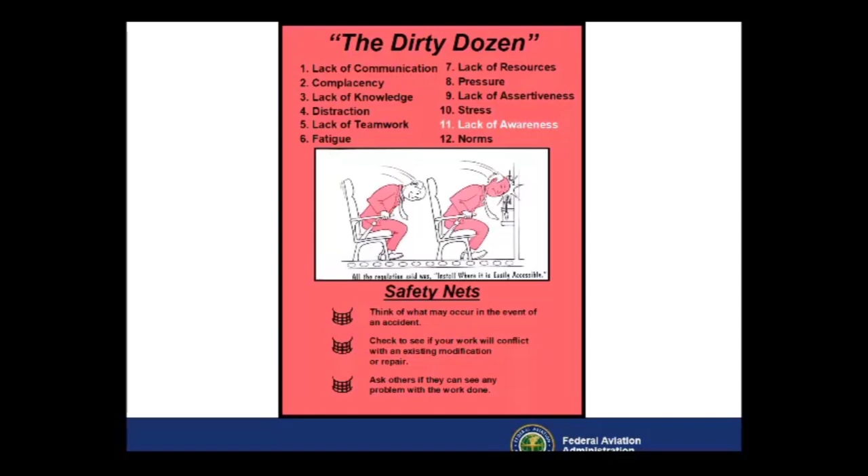Lack of awareness, or reduced situational awareness, can be an indication one or more other human factors issues are in action, such as fatigue, distraction, or lack of communication. Here's an example of how the lack of awareness caused some serious damage.

Lack of awareness: Aircraft operated at just below gross weight, had 90% of required fuel for a 2.5-hour flight, but the flight was only 55 minutes, and it could have been a problem during auto rotation. Engine operated past cycles by AD prior to accident. AD 2009-9-3 required engine inspection at 500 cycles. Engine had accrued 515.28 cycles. Let me give you a little background on that.

In the accident, pilot off called the LifeCom. He reported 2+55, which means 2 hours 55 minutes of fuel, which equates to a fuel load of 90%. Mission fuel is usually 2 hours, and the flight to Douglas would have taken 55 minutes. Therefore, the helicopter would have landed at Douglas with a mission fuel load of 2 hours.

A review of the maintenance record showed that on June 21st, 2010, the engine cycles had exceeded the inspection requirements outlined in the AD. The airworthiness directive was due at 600 hours or 500 cycles, whichever occurred first. At the time of the inspection, the engine had acquired 308 hours and 515 cycles. The company identified the oversight and complied with the AD.

Let me give you a little background on that. Weight and balance calculations were done by the pilot using a spreadsheet program available at each base and tailored for each aircraft. The actual weight and balance calculations performed by the pilot for the accident flight was not recorded and was not located in the wreckage, presumably destroyed. The spreadsheet program designated for the AS-350B3 dual listed a helicopter's weight at 3,329 pounds, the pilot's weight as 210 pounds, medical crew weights at 210 pounds.

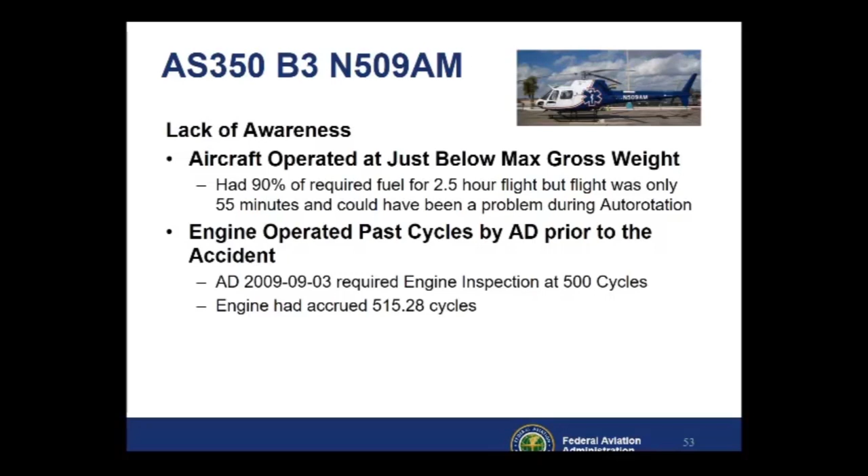The flight manual lists the max gross weight at 5,225 pounds. He was 35 pounds under gross weight.

The rotor RPM gauge is a dual gauge representing engine/free turbine speed, displayed using LED bars along the arc of the gauge. The gauge itself is approximately 2 inches in diameter, and in the accident helicopter it was installed in the lowest left portion of the pilot's instrument panel, as shown on the slide by the red arrow. According to the airframe manufacturer, this is not the standard location for this instrument in this helicopter.

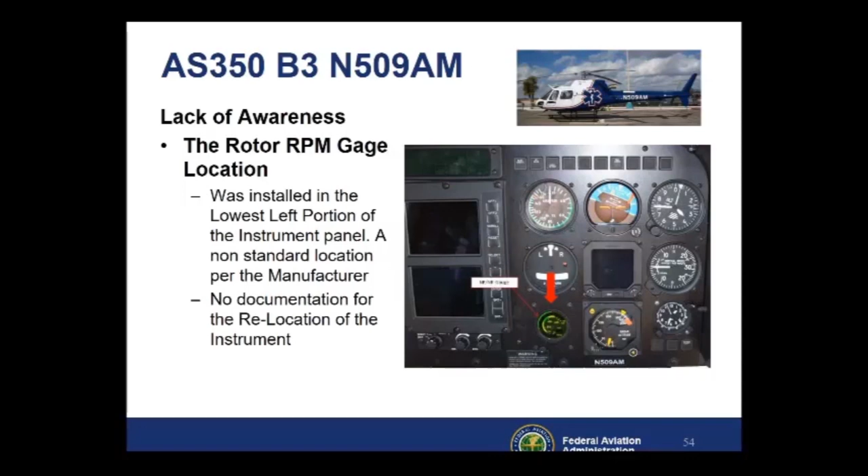There are no 337s on file at the FAA since the aircraft was destroyed in 2010. The documents have been removed. So we don't know if they moved it down there in accordance with an STC, or if they had a 337, but for some reason it was moved down to the lower left corner.

The commercial pilot was performing external load operations in the helicopter when one main rotor blade separated, which resulted in a loss of control and collision with terrain. The helicopter rolled downhill and the airframe sustained substantial damage.

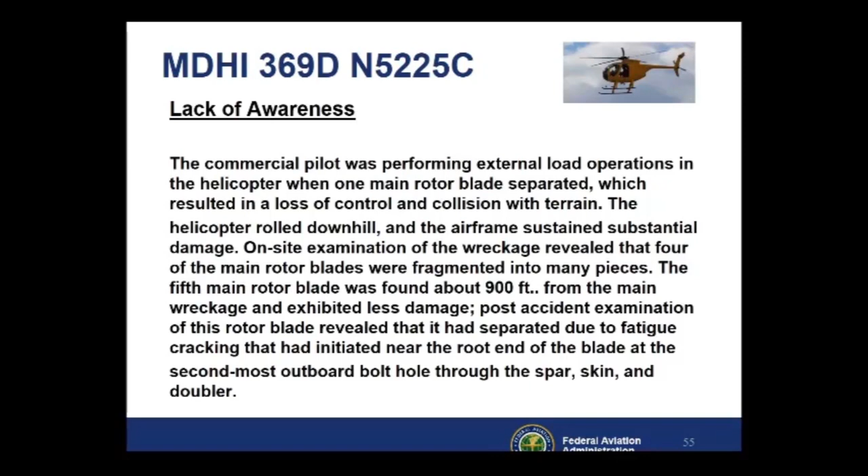On-site examination of the wreckage revealed that 4 of the main rotor blades were fragmented into many pieces. The 5th main rotor blade was found about 900 feet from the main wreckage and exhibited less damage. Post-accident examination of this rotor blade revealed that it had separated due to fatigue cracking that had initiated near the root end of the blade, at the second most outboard bolt hole through the spar, skin, and doubler.

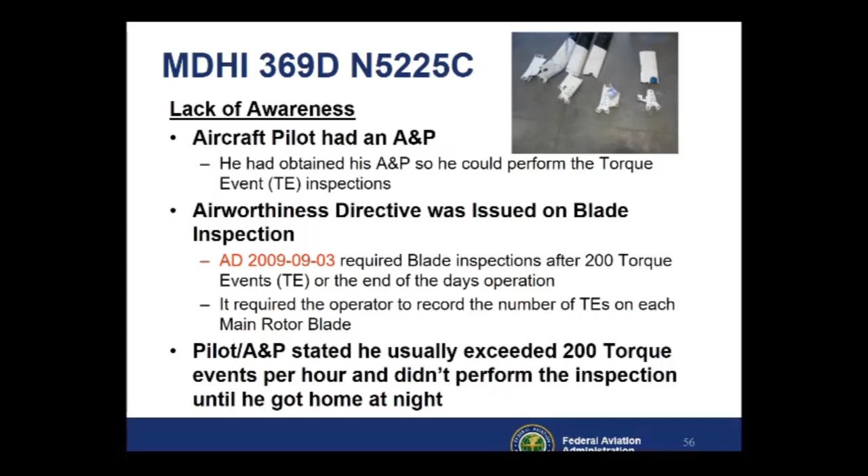The pilot stated he obtained an airframe and powerplant certificate so that he could perform the TE inspection. He added that he averaged about 200 TEs per hour and that he tried to comply with the AD as best he could on work sites. On a typical job, he usually did not perform the TE inspection until he got home that night.

Here's a picture of the rotor blades as seen at the crash site.

The NTSB determined the probable cause of this accident to be the pilot/mechanic's failure to properly perform required inspections of the main rotor blades at the necessary intervals, which resulted in an in-flight separation of the main rotor blade due to disbonding and fatigue cracking. Contributing to the accident was a lack of clear guidance in the helicopter's maintenance inspection instructions, which allowed for possible misinterpretation by maintenance personnel of their intent.

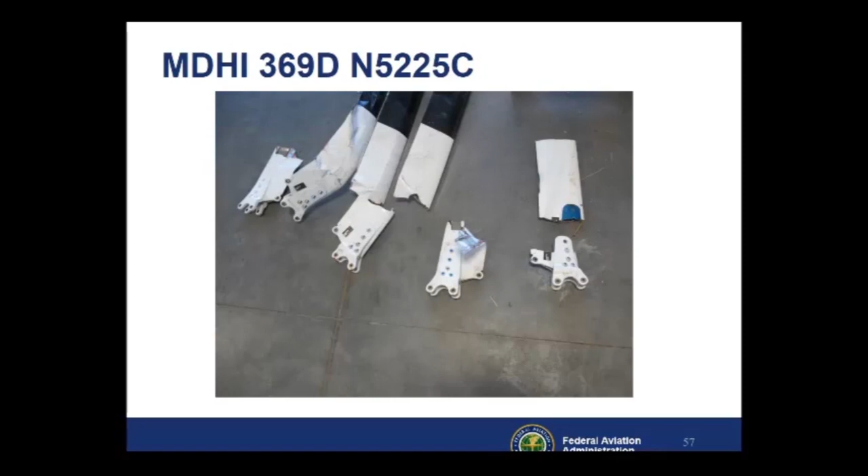We've all seen that in ADs before, being misinterpreted, because sometimes the ADs are a little vague and hard to understand. Lack of awareness - what's the safety net for lack of awareness? Think of what may occur in the event of an accident. Check to see if your work will conflict with existing modifications or repairs. Ask others if they can see any problems with the work done.

Norms. Norms in the context of the Dirty Dozen means our group has a better way to do this job than the published procedures. We call that tribal knowledge. It could be considered tribal memory, unwritten rules enforced by a group, peer pressure, or habits.

In the case that follows, someone decided to reuse a castellated nut that was worn out and would not have come loose if they would have installed a cotter pin.

You can look up norms in the dictionary, and what it says, the definition for it is an authoritative standard, a principle of right action binding upon the members of a group and serving to guide, control, and regulate proper and acceptable behavior. A set of standards of development or achievement usually derived from the average. A pattern or trait taken to be typical in the behavior of a social group. Widespread practice, procedures, and customs. I think that's how we most interpret it right there.

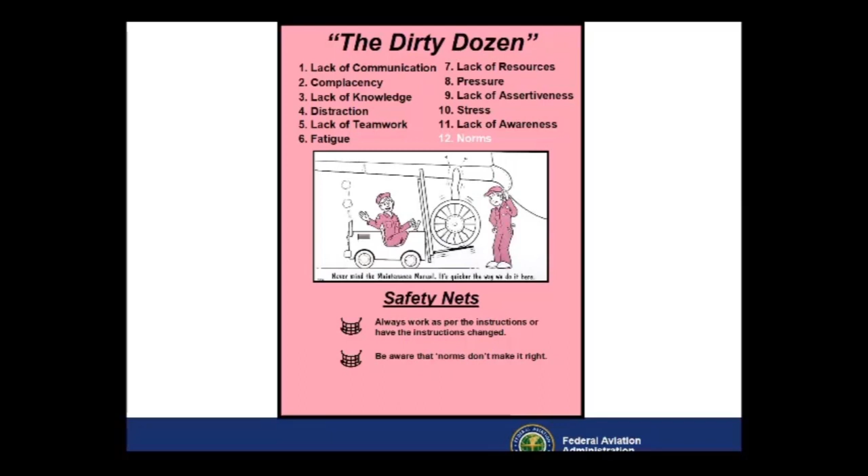In this accident we mentioned earlier under fatigue, but norms may have also been a factor. Improper use of connection hardware began a chain reaction that led to the crash of an AS-350 on a sightseeing flight.

The NTSB says a series of maintenance errors was responsible for the December 7, 2011 crash of a Sundance helicopter, a Eurocopter, in the mountains east of Las Vegas. The NTSB says the pilot and all 4 passengers on the Twilight Tour sightseeing flight were killed in the crash. The helicopter was destroyed, and an NTSB meeting convened to review the accident.

The Chairman of the NTSB noted that research has shown that the primary category of maintenance error is failing to carry out necessary actions. Norms in play.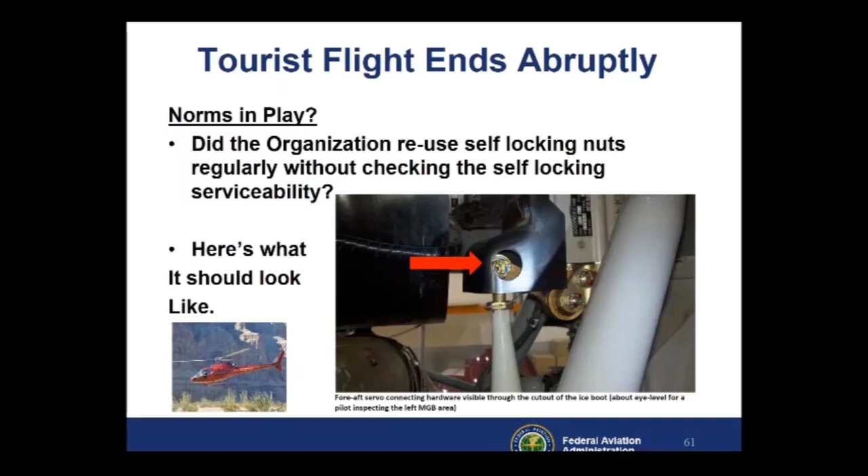Did the organization reuse self-locking nuts regularly without checking their self-locking serviceability? This is a self-locking castellated nut, which tells you right there it's 2 different locking methods on this one nut. So it's got to be a critical component. Here's a picture of what it should have looked like.

The flight began at 16:21 local time when the helicopter took off at dusk from McCarran International Airport in VFR conditions with good visibility. The pilot planned to fly to Hoover Dam, about 30 miles southeast, and then return to the airport.

The helicopter was not equipped with flight data recorders and they were not required. However, radar data from the FAA showed the helicopter had been level at 3,500 feet with a ground speed of 120 knots until about 1 minute before impact, then climbed to 4,100 feet, turned 90 degrees left and slowed. The helicopter descended to 3,300 feet, tracked northeast for 20 seconds before entering a left turn and plunged towards the ground at a rate of at least 2,500 feet per minute.

The NTSB said in its final report on the accident, parts of the helicopter were destroyed by post-impact fire. The wreckage was found in a ravine about 14 miles east of Vegas.

Maintenance personnel: the mechanic who installed the forward aft servo received his airframe and power plant mechanic certificate in December 2008. He worked on maintaining general aviation airplanes and business jets before being hired by Sundance in June 2011.

After his hiring, he received indoc training in record keeping, maintenance procedures, and use of the Eurocopter manuals, as well as on-the-job training, but had not yet attended any helicopter-specific training.

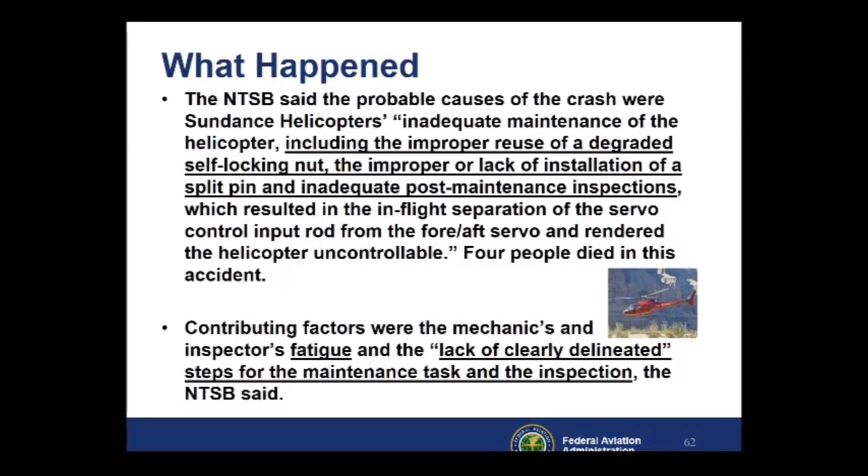So contributing factors were mechanics' and inspectors' fatigue and a lack of clearly delineated steps in the maintenance task and the inspection, according to the NTSB. Okay, what they found at the accident site.

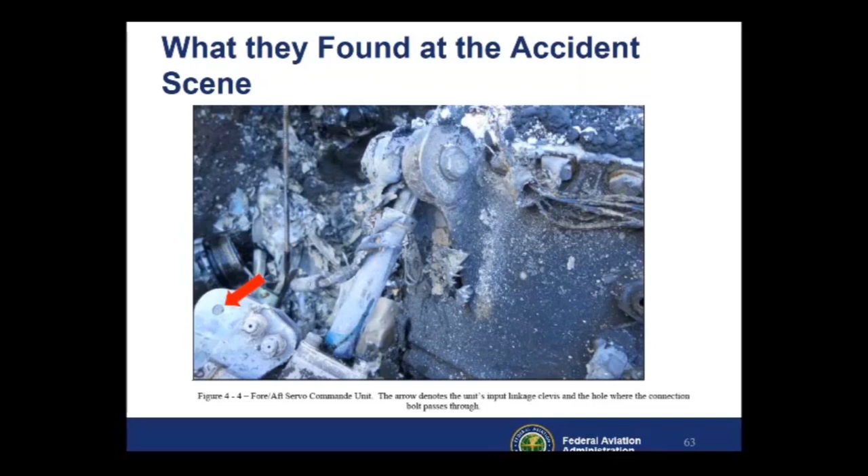So what's the safety net for this norm? Always work as per instructions, or have the instructions changed. Be aware that norms don't make it right.

The Dirty Dozen is a catchy title, but it's possible there are more than 12 human factor issues. These 12 are meant to stimulate the human factor discussion. What about illness, emotional issues, anger, pride, alcohol and drug abuse?

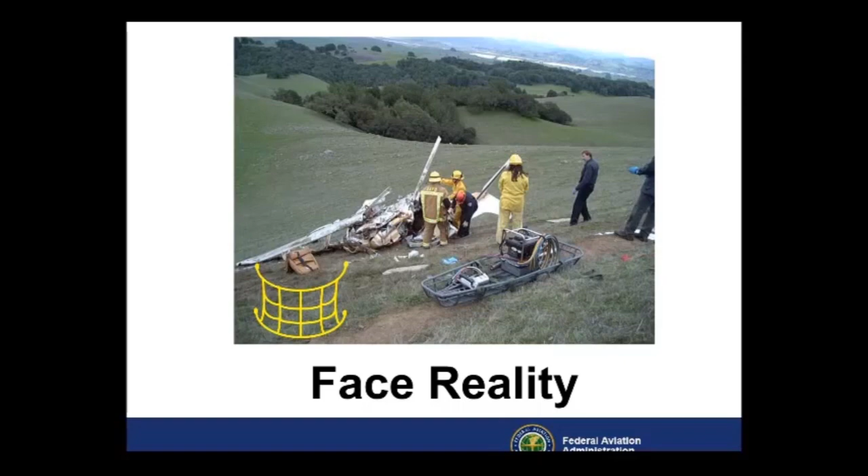Errors are part of life. Errors are natural and forgivable. It is the context of the errors that makes them tragic. Maintaining and operating aircraft is the most unforgiving context. The reality we face in this industry is that if we make even the slightest mistake, it may well cause a fatal accident. As we've seen time and time again, it's always a chain of events that leads to an accident, not just one thing.